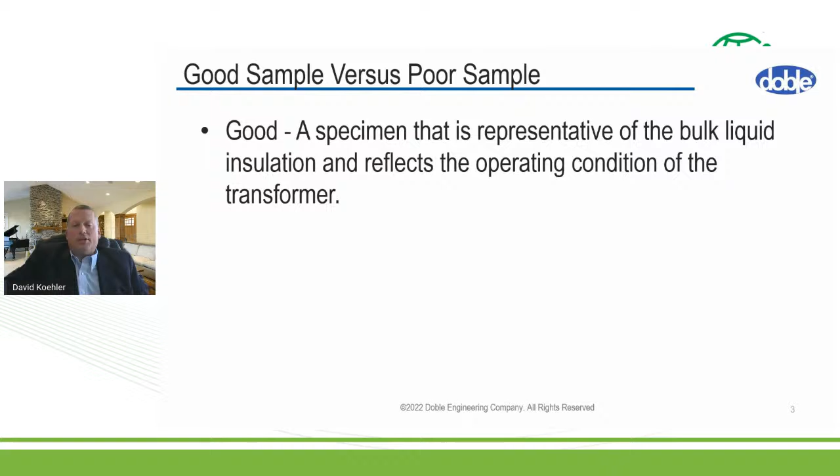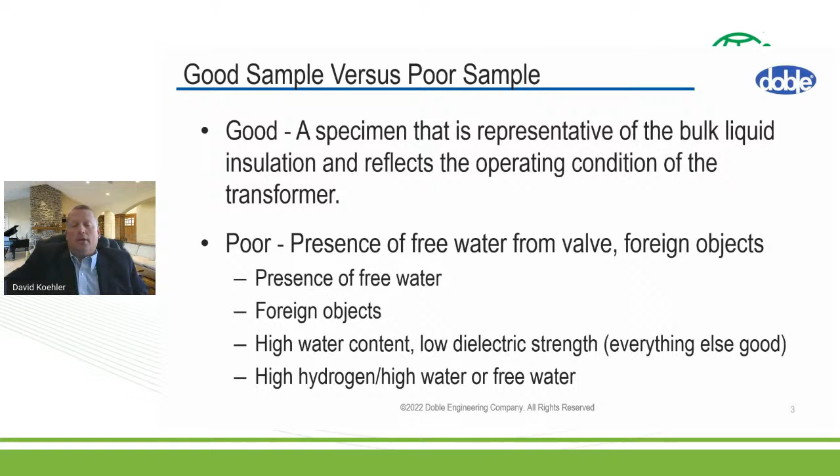What's absolutely important is, no matter what the lab is, whether it's a commercial lab or a utility lab, the sample of oil received for testing must be representative of what we call the bulk liquid insulation within that transformer. Over my years in the industry, I've seen grasshoppers, bugs, etc., all types of things within the sampling containers, but they were not actually in the oil within the transformer, and that can affect the test results we generate.

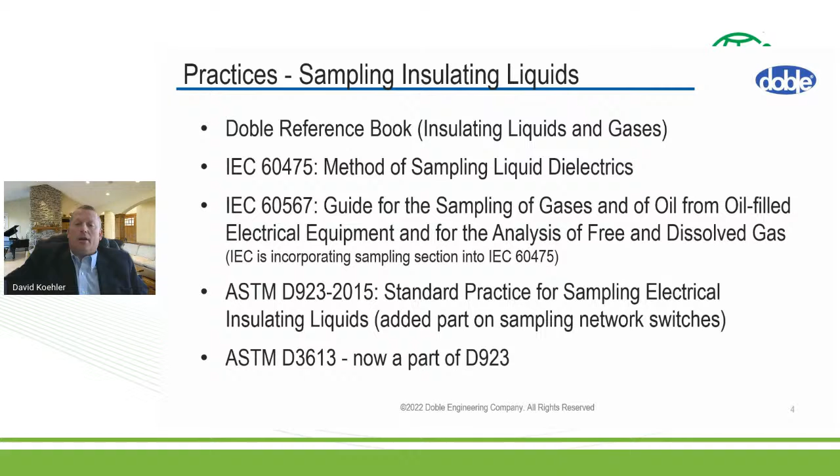There are numerous guides available in our industry on how to obtain a proper oil sample. Doble, the company I work for, has a reference book. IEC has 2 different guides depending on what tests are going to be done. And then ASTM has ASTM D923, which is predominantly what's used here in the United States and Canada.

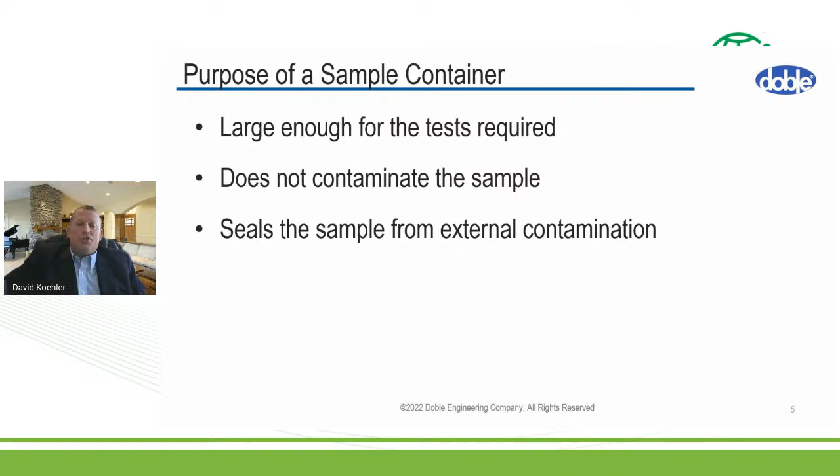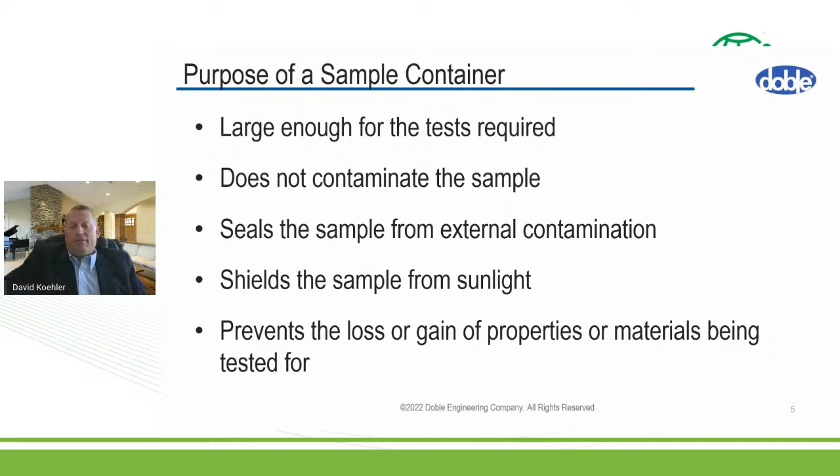Now, why do we use a sampling container? We need to make sure it contains enough oil for the test being requested—usually we ask for twice the amount of oil. We also want to make sure it doesn't contaminate the sample, whether through leaching or water ingress issues. You also want to make sure it shields the sample from external contamination—sunlight has energy, so there are UV rays. You want to make sure that oil is not degrading before it's tested in a lab, and of course it prevents the loss or gain of materials being tested for.

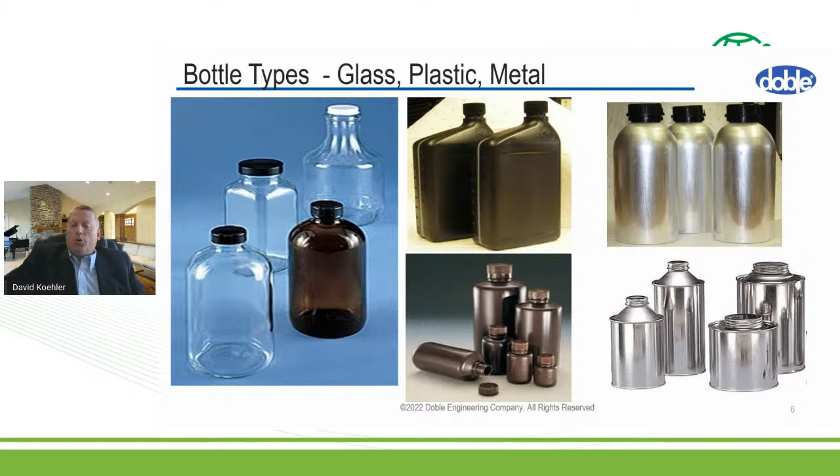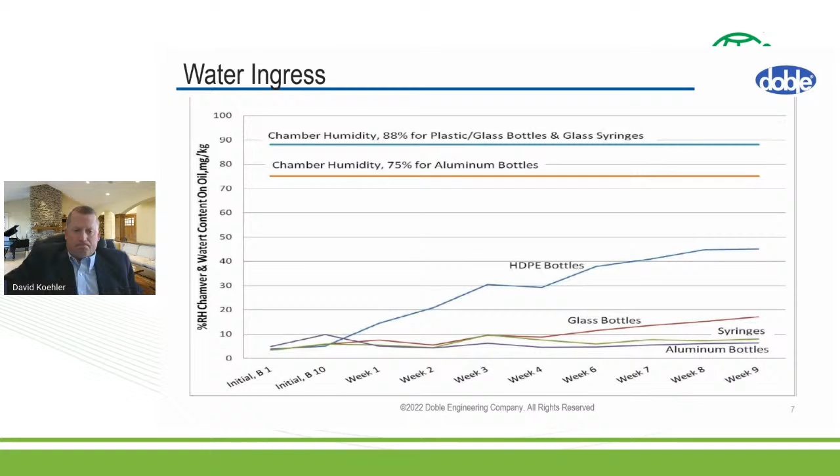Condition-based maintenance is the focus within our industry, within the Power and Energy Society. Through oil tests, we can make condition-based maintenance possible. When I started in this industry in '98, it was time-based, so they would take oil samples every year, every other year, depending on what the utilities' practices were. But now we've moved to a much more effective and cost-effective condition-based monitoring system.

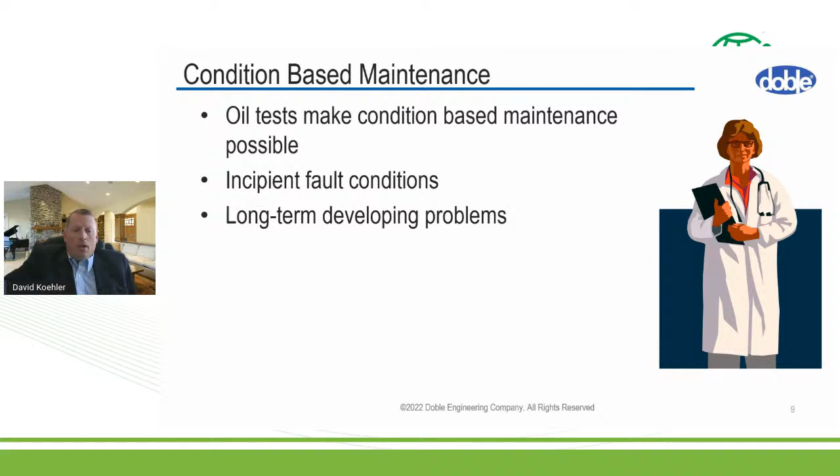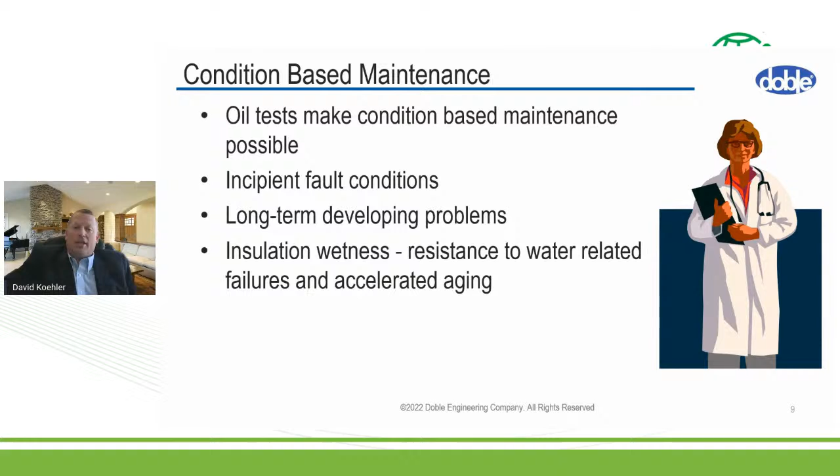It allows us, most importantly, to identify incipient fault conditions. That could be overheating, that could be an electrical issue within a transformer. It allows us to find the issue before the unit fails or any other catastrophic issues occur. We can also identify long-term developing faults. We can tell if the oil or the cellulose insulation, which is in the windings at the center of the transformer, is wet. Water's bad in insulation systems and causes significant issues, and it also affects the aging life of the insulation.

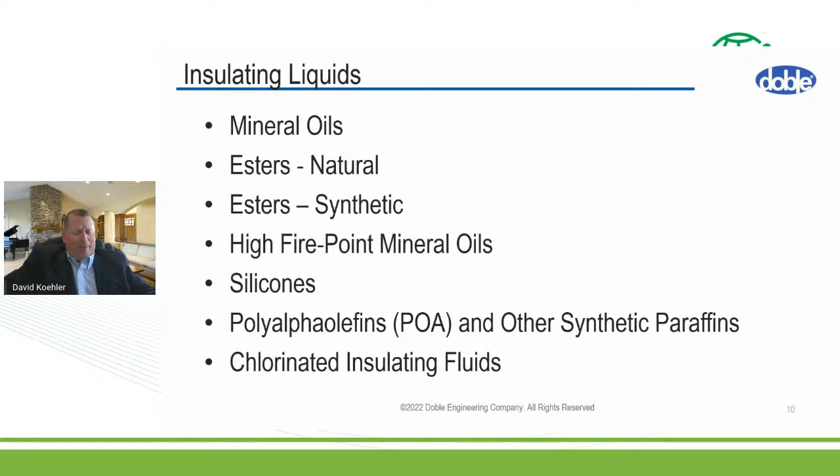So we have various types of insulating liquids currently available globally. The one used most is mineral oil, and that would be the focus of my talk today. But we have natural and synthetic esters, silicone oils, and down below are chlorinated insulating fluids. Those aren't made anymore, but you still have some transformers filled with this liquid.

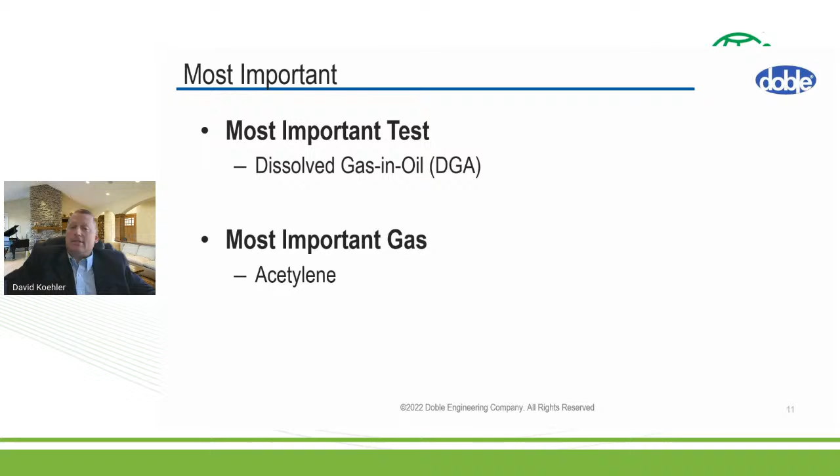So again, the most important test is called dissolved gas in oil. What we do is extract the gases out of the oil, analyze them, quantify them, and see what's present. The most important gas we look at is acetylene. It takes the most energy, the highest temperature to form, and we'll talk about that.

So from DGA, we can tell the following issues just from the test results and looking at trending. We can tell if it's a partial discharge issue, overheating issues, whether it's low temperature or high temperature. Arcing, of course, in a transformer is the worst case scenario—that unit will fail unless it's remedied. We can tell if it's the breakdown of the paper, maybe there's stray gassing, which is a chemistry reaction that takes place with different oils that aren't refined properly, or maybe there's contamination.

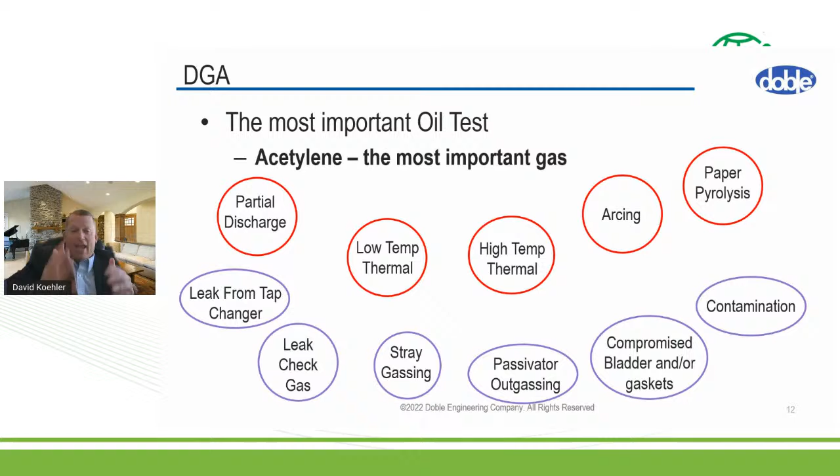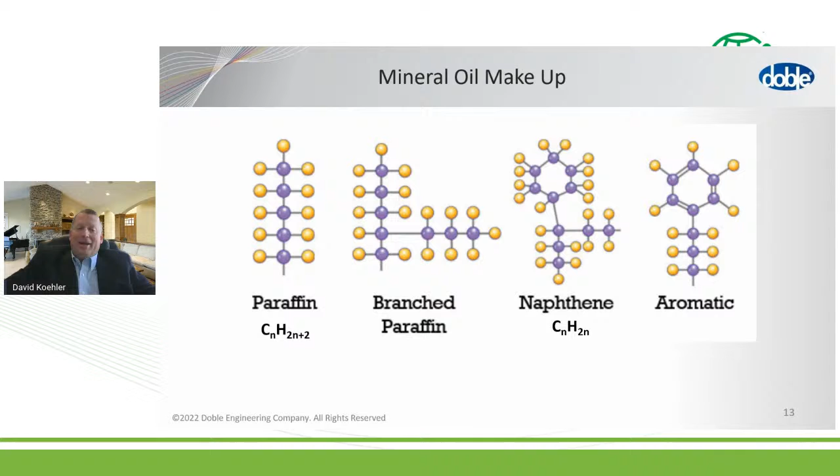Now, when we talk about mineral oil, we call it a hydrocarbon oil, and that just means it contains a bunch of hydrogens and carbons. You can see here the purple would be carbon, and the yellow would be hydrogens. It can be in various different structures, whether paraffinic or aromatic, but at the end of the day it contains hydrogen and carbon molecules.

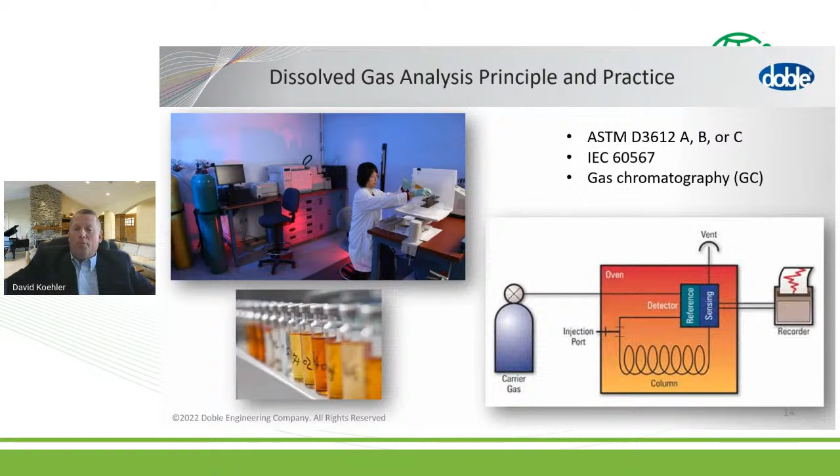Now, how we do this test is we take the oil, put it in the vial shown in the lower left-hand picture, and in the top left picture you can see a gas chromatograph, or GC. That oil is heated up, shaken for a period of time, and the gases that were dissolved in the oil are liberated out and go to what we call a detector, giving us what we call a chromatogram. Based on the retention time, or where the gases elute from the column to the detector, we know what gas is being analyzed.

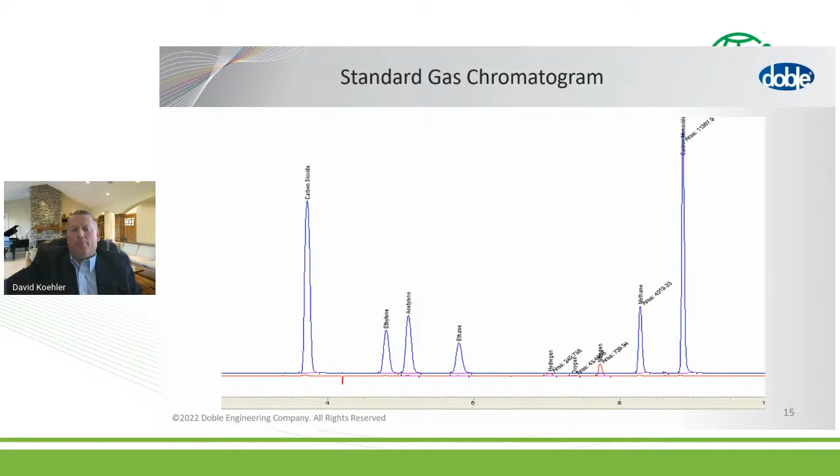And then from proper calibrating procedures, we can tell based on the area under the curve what the equivalent parts per million will be for each of the gases being analyzed.

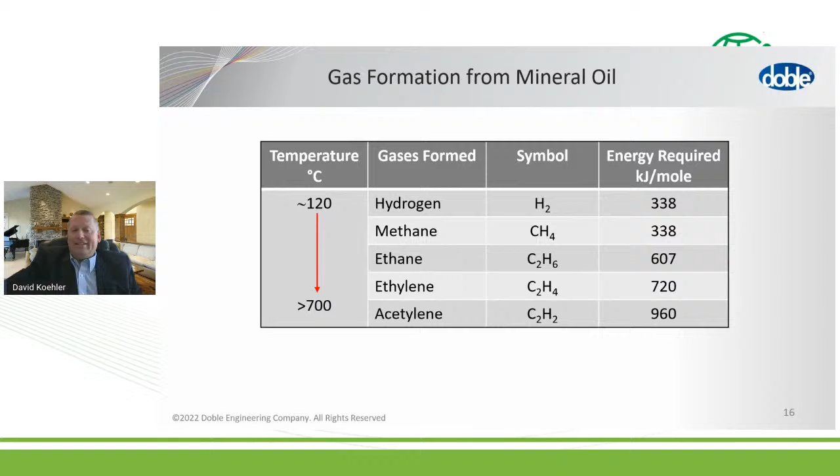So again, when we talk about the breakdown of mineral oil, acetylene starts to be produced at about 700 degrees C. That's a very high temperature hot spot, most likely caused from arcing.

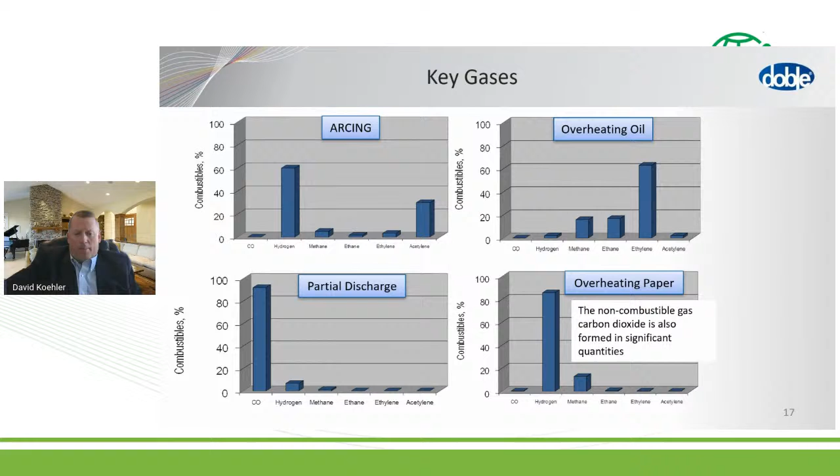Depending on what temperature and duration, you'll have various levels of the other gases. Bottom left would be partial discharge. We have carbon monoxide and hydrogen. And to the right, we have overheating of paper.

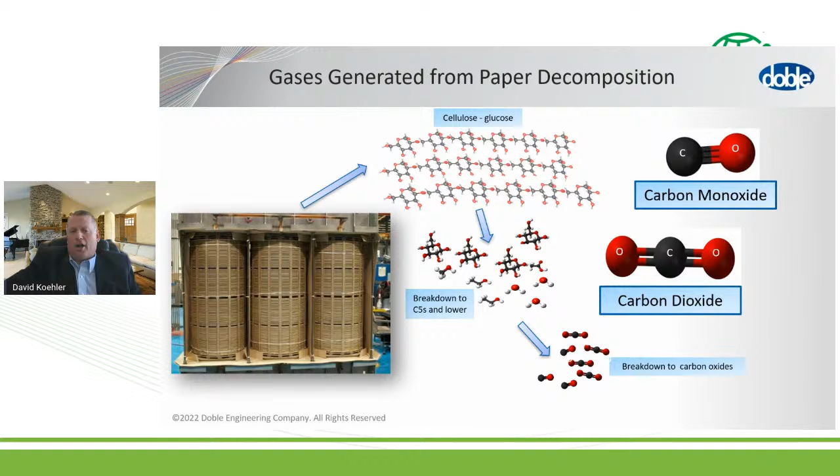This is a picture of the windings of a transformer. When they break down, they degrade from the cellulose structure and produce glucose. Glucose is not readily soluble in oil. However, it will break down and form carbon monoxide, carbon dioxide, and what we call furanic compounds, and we'll talk about that. But once we get the data, we need to know more information.

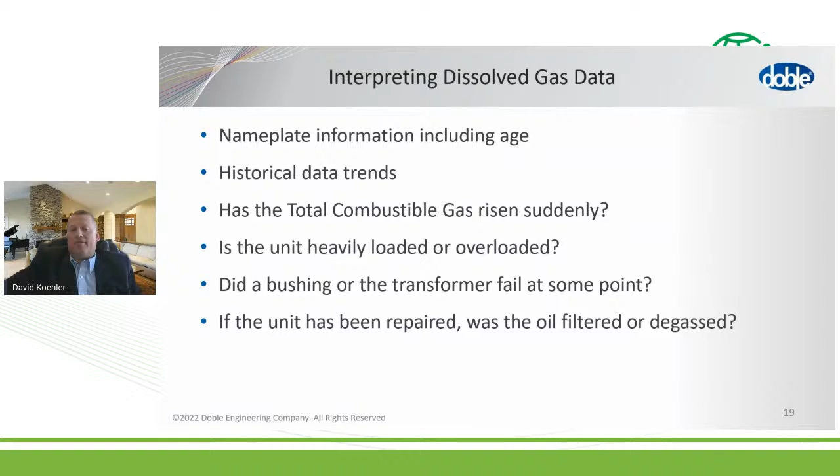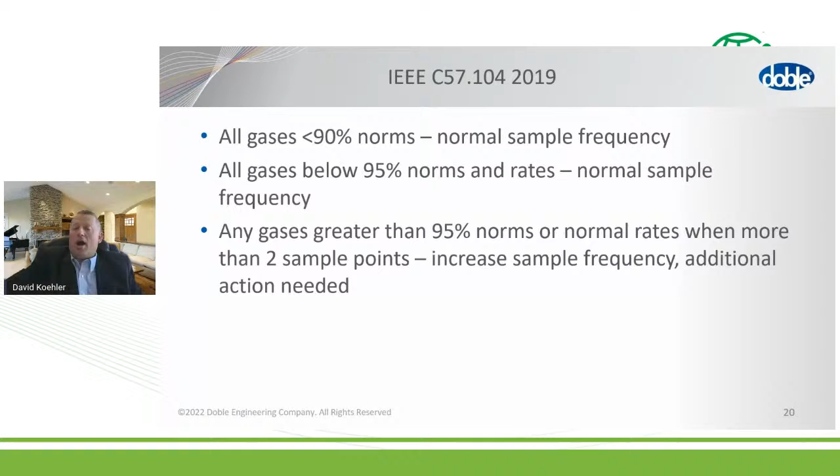Our Standards Association with IEEE came out with, in November 2019, an update to IEEE C57.104. What it did is it broke down the DGA results into 3 different statuses. Status 1 would be all gases below the 90th percentile norms that they published. Status 2 would be all gases below the 95th percentile norms and rates. However, any gases higher than the 95th percentile thresholds or normal gas generation rates required increased sampling frequency and additional actions. So that unit could be in a status 2 or 3.

The tests that we do on the oil are broken down into 3 different categories. On the left, the most common ones, are diagnostic tests. In the middle, tests that allow us to ascertain whether the oil in its current condition can do its job, which is dissipation of heat from the windings where the heat is really generated, and acting as a dielectric liquid. To the right are investigative tests, which would be recommended should any of the other mentioned tests come out abnormal or not make sense.

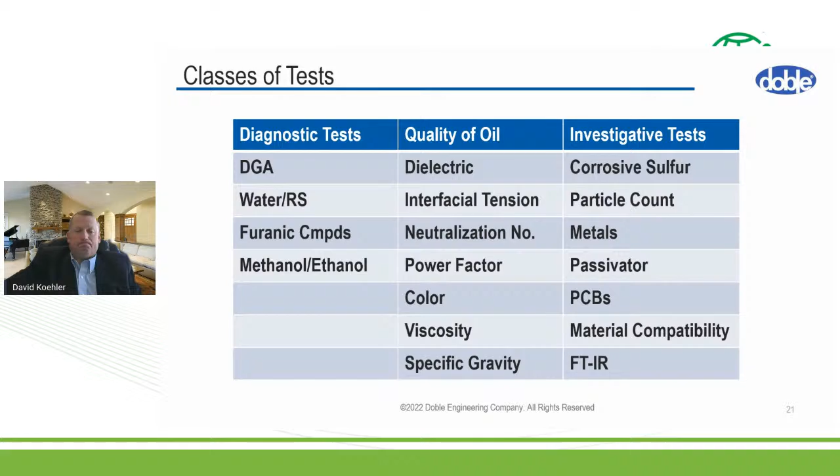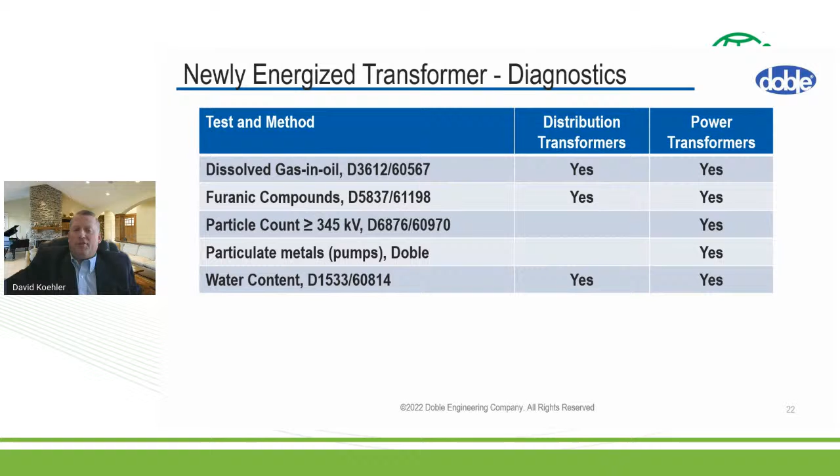So for newly energized transformers, if it's a power transformer, we recommend all these tests be done. If it's just a distribution or smaller voltage class transformer, we recommend a DGA, furan, and water content just to establish a baseline reading for your unit.

So you would want to do DGA again, the most important test, at all these durations: a day after energizing, a week, a month, 6 months, and a year. And why is that important? Because these transformers come with warranties, and you want to identify an issue with the transformer before that warranty ends, to protect your investment.

Oil quality tests on new transformers: the oil doesn't degrade quickly unless there's a leak, or there's high levels of oxygen, or a lot of heat that's available. So we just recommend a common screen package be done there.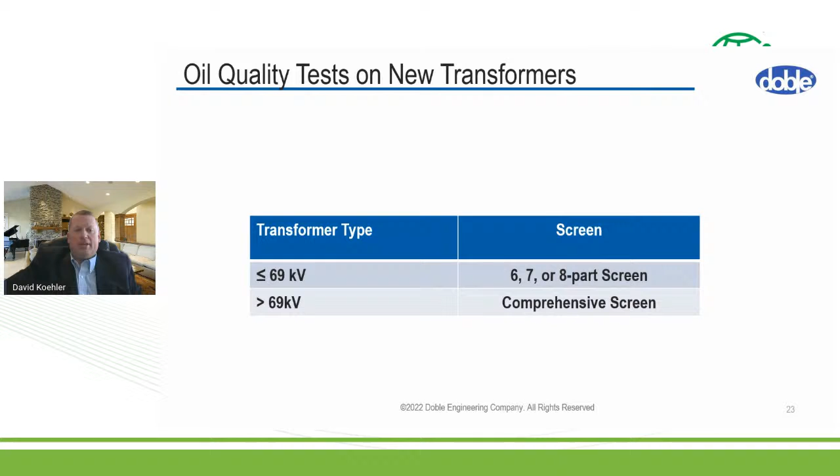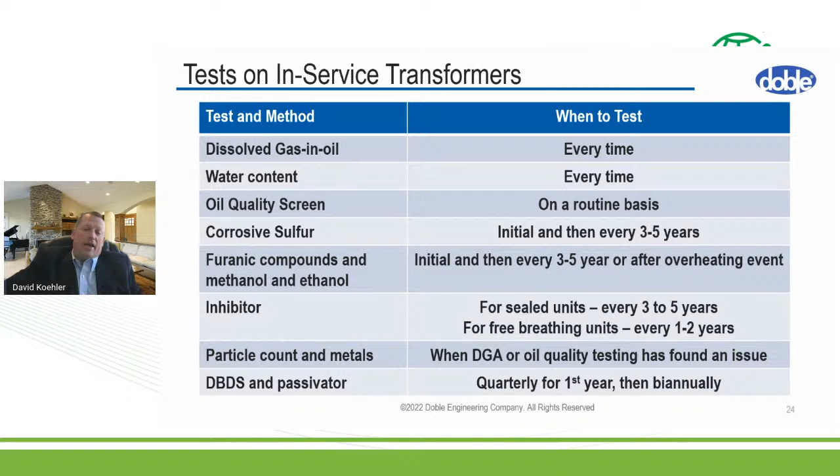Then tests on in-service transformers. Every time you're going to pull a sample, we'd recommend you pull a syringe, which is where you get the oil for the DGA and the water content. Other tests can be done on a routine basis, depending on: is it a sealed unit? Has there been any overheating issues? All those types of things.

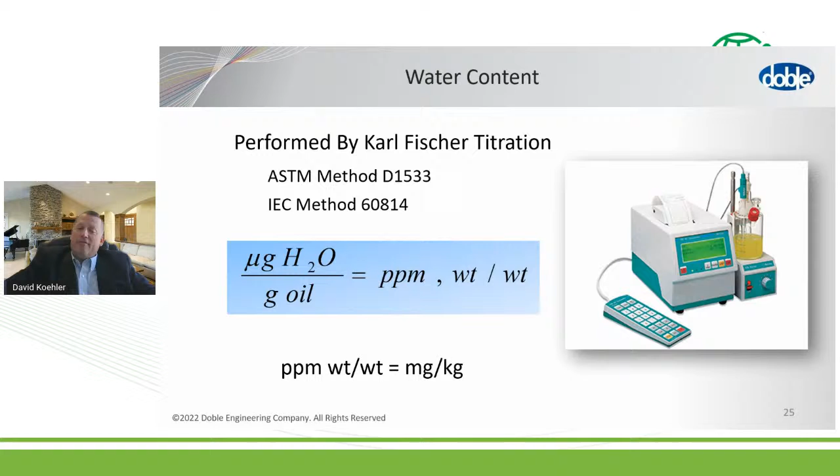Another important test we do in the laboratory is measure the amount of water dissolved in the oil. We do that via ASTM D1533, also called the Karl Fischer titration method, named after the famous German chemist that developed the test method. We literally take the oil and inject it into that red circular area, and it goes right into what we call the vessel solution. The test equipment measures the micrograms of water, and from that we can calculate the parts per million of water dissolved in the oil.

Why is water important? We interpret water results similar to how we do with the weather and percent humidity. We need to look at the percent of water present relative to how much water that oil can hold at a given temperature. For example, mineral oil at 90 degrees C can hold up to 592 parts per million. However, at 10 degrees C, it can only hold 36 parts per million.

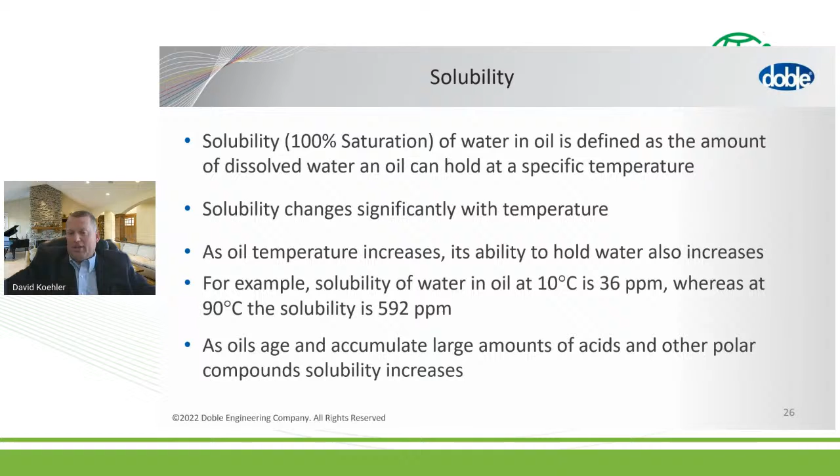So once you get, for example, at 10 degrees C, once that water content of the oil approaches about 35, you're really saturated. You can get free water formation occur, which has incredibly low dielectric strength. This is the expression of the relative saturation in percentage.

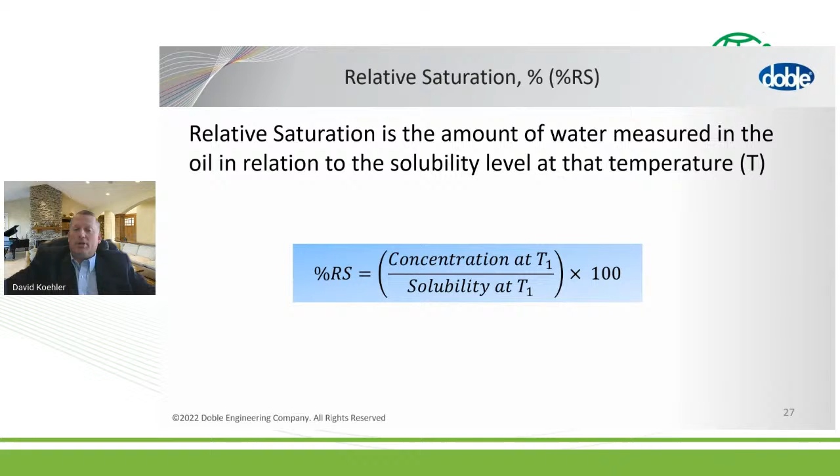Again, we look at the concentration that we measure in the laboratory versus at the temperature at the time the oil sample is taken, how much water can that oil hold, times 100.

Here are two vials. They each contain 30 parts per million of water in the oil. However, the vial to the left is at 50 degrees C. That oil can hold significantly more water, so it has a clear visual appearance and a low relative saturation of water in oil. The one on the right is still 30 parts per million, but the temperature is only 0 degrees C. You can see it has a cloudy appearance. It's got emulsified water, and down below at the bottom, if you could see it, you'd have free water formation.

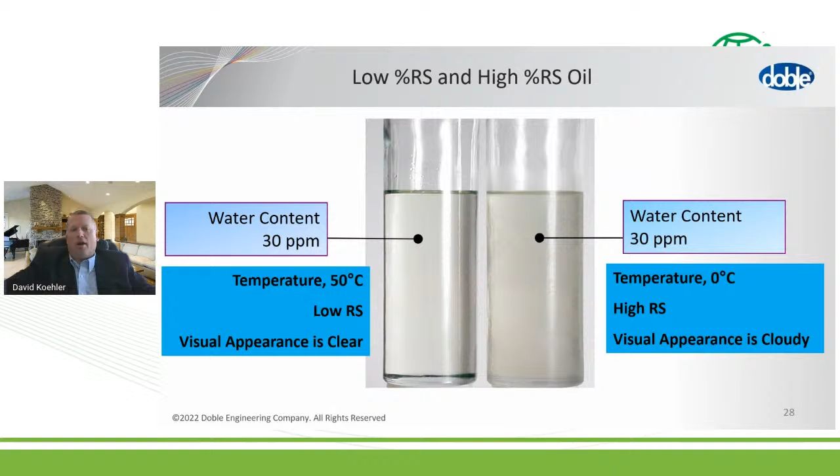So when we continuously measure the amount of water in a transformer with an online monitor, you can see it changes over time. That's because in a transformer, 99% of the water is typically in the paper, not in the oil. But over time, through heating and cooling, through changes in the loading of the transformer, you're going to see changes in the amount of water that's in the oil over time.

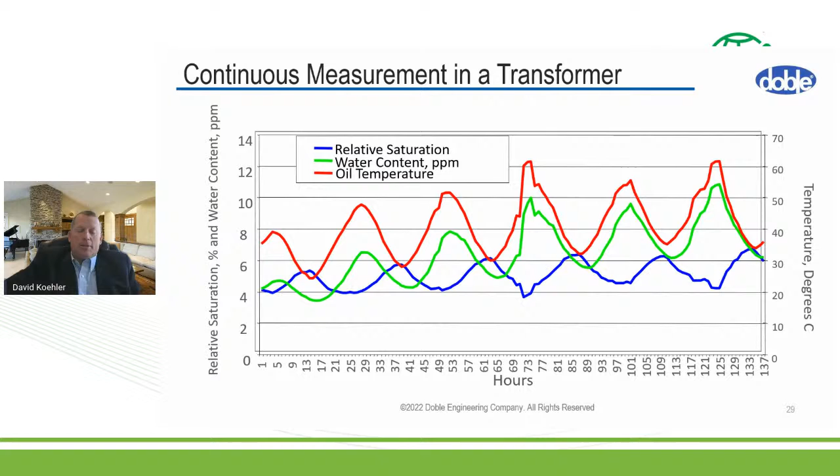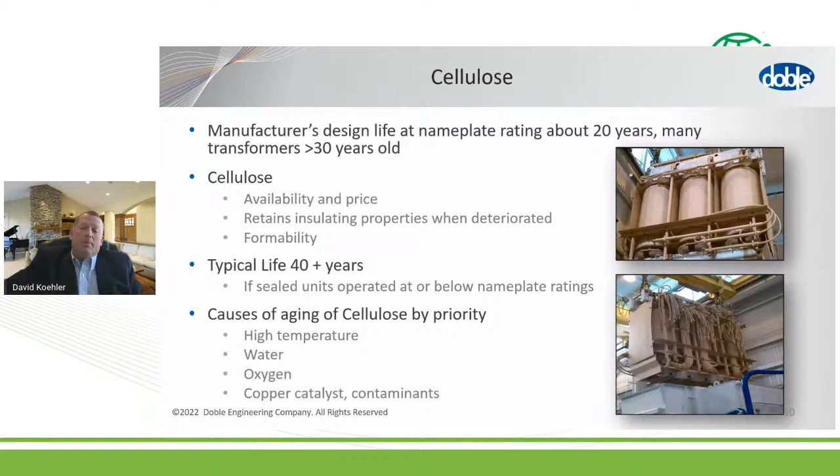The key is keeping temperature down, keeping the water content down, and oxygen. All of those add to the aging factors. You can see here from this slide, the number one aging factor is heat, then in order is water and oxygen. Here's a zoomed in magnification of cellulose.

It's a polysaccharide molecule, and you can see here it goes on for many chains. So when paper is brand new and put in a new transformer in a factory, it has about 1,000 to 1,300 of these chains.

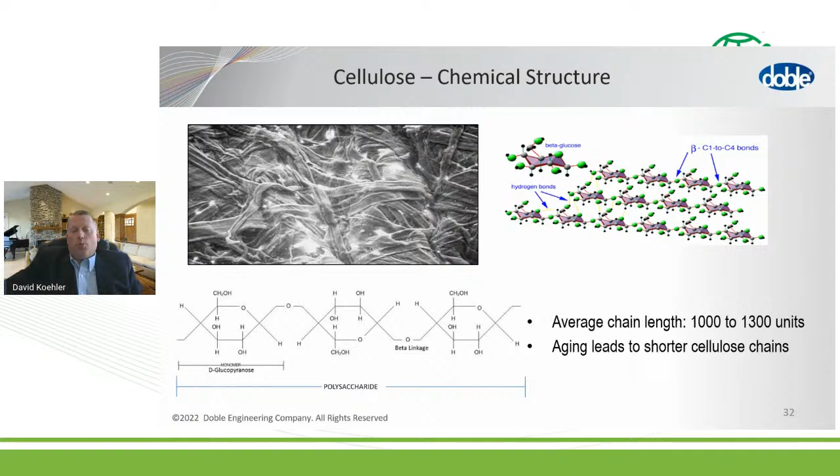However, over time, these bonds become broken and the paper becomes weak and brittle. That, at the end of the day, is what causes the end of life for a transformer.

So again, when that paper breaks down, it produces glucose. That's broken down, and that'll produce carbon monoxide, carbon dioxide. It'll produce acids, furanic compounds, which we can relatively test the oil for, and then alcohols, methanol and ethanol, which we test for very closely, and water.

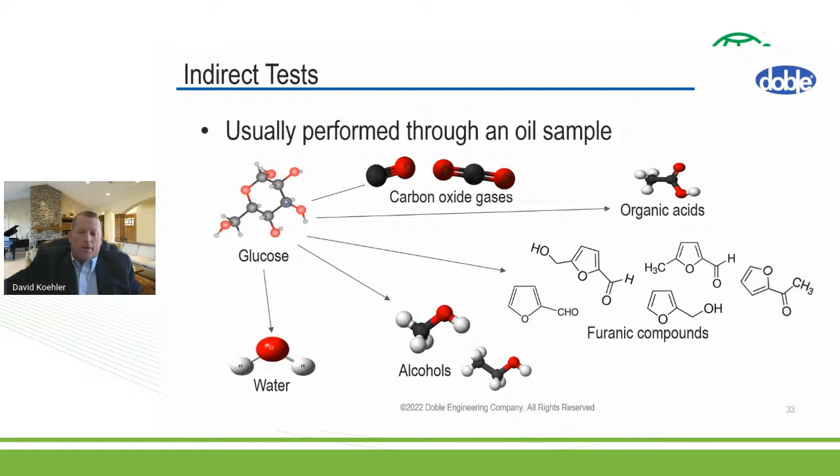So based on these oil test results, what we want to do is come up with a transformer health review or condition assessment. A lot of companies will take the oil test results coupled with the offline electrical test results, testing done when the unit's taken offline, and give an overall transformer condition code.

What they try to do is make sure it's very clean and easy to understand. Red typically means warning or there's an issue, where green is typically acceptable, and they'll give a summary sheet so they don't have to look through hundreds of pages of data. They can quickly see which units require additional overseeing.

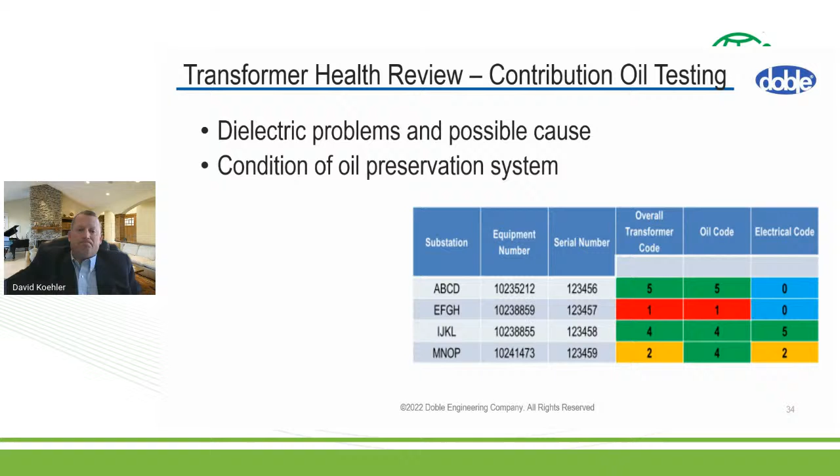They also recommend that you use a software system that allows you to easily access and review your oil test results. That allows you a way to see the condition of your fleet in real time, and allows you to really do a deeper dive and look at those units that are causing more of an issue. This is just an example, and then looking at the trending of your test results. There's a graphical representation of DGA and water content results.

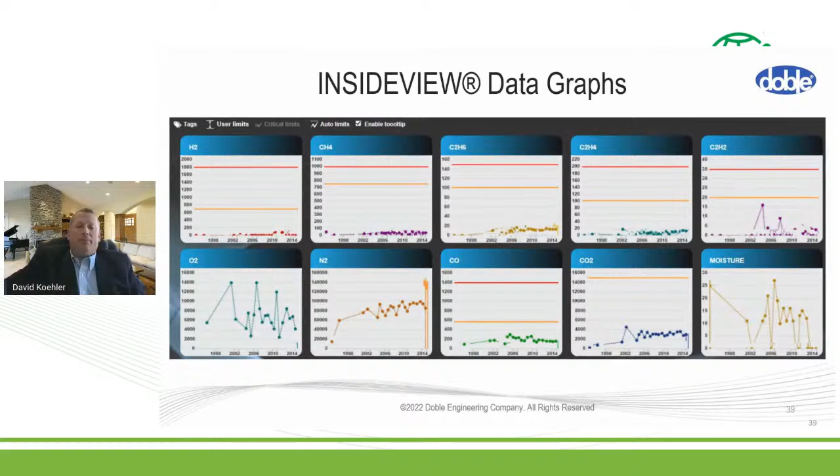Now, in the last few minutes that I have before we open it up to Q&A, let's go ahead and go over, I believe, 3 case studies here. So here's a transformer. It's 24 years old, 115 kV, 40 MVA rated.

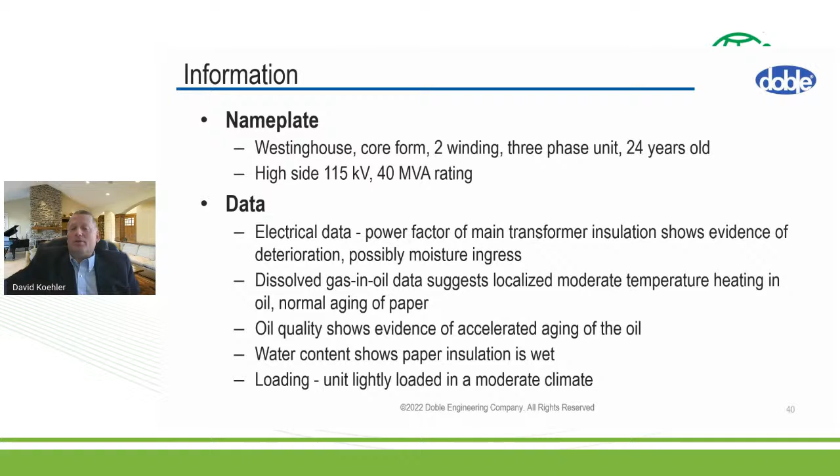The electrical test results showed that the Doble or power factor result was high, which could indicate water issues. The DGA results showed moderate high temperature or overheating of the oil, and it shows the condition of the oil degraded over time. The water content showed that the insulation is wet. However, the unit was lightly loaded, so it shouldn't be having overheating issues.

But let's look at the data. Here's the DGA results. You can see that the gases are going up over time, but with that June 24, 1994 sample, the gases dropped immediately. That's because the utility degassed the oil.

Once you get a significant amount of combustible gases present within a transformer, it can become a safety issue. The oil could catch on fire or the transformer could explode. So what they were doing here was monitoring it over time, waiting for a new transformer to arrive, just trying to make it last.

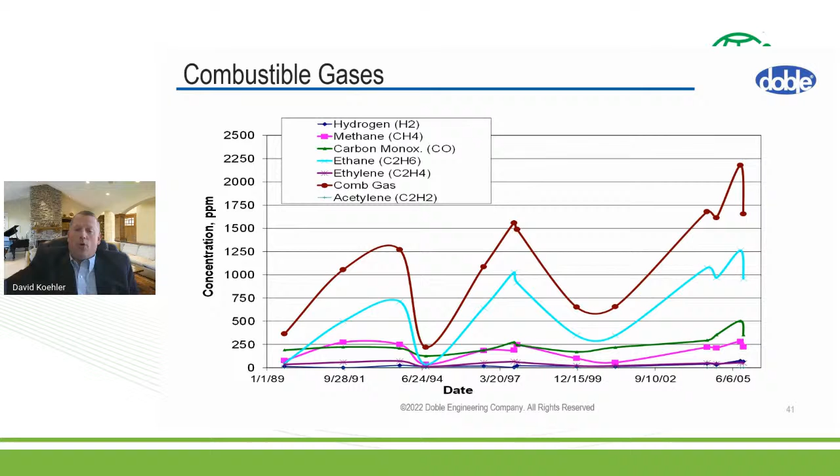But you can see after each degassing, another one occurred in December of 1999, and then of course another one in June of 2005. These gases just continue to rise, showing a clear indication with ethane going up of an overheating issue.

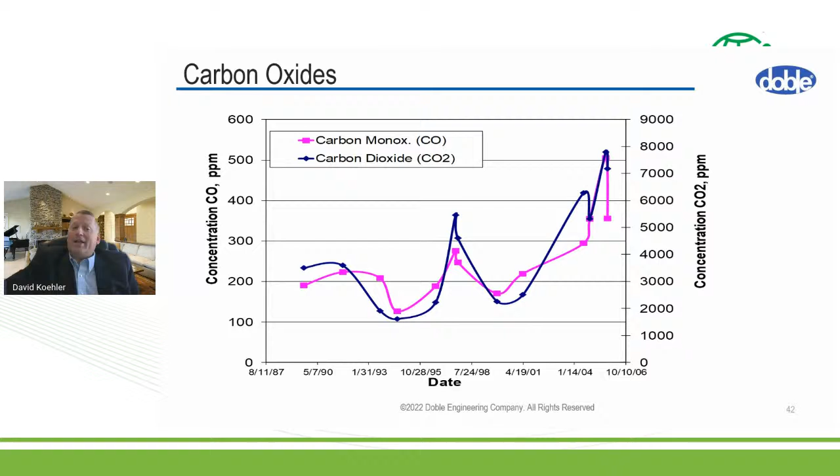As we look at the carbon oxide gases, carbon monoxide and carbon dioxide, again they're affected by the degassing, but over time they're still going up. That's an indication that the paper or the cellulose is breaking down.

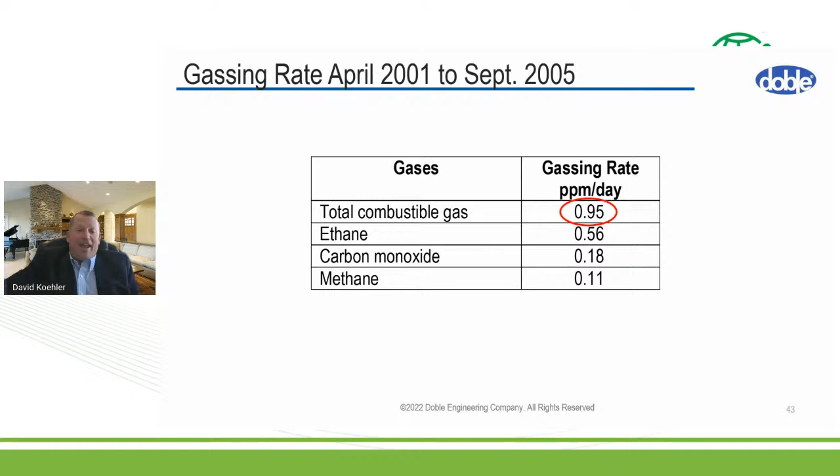As we look at the gas generation rate from April 2001 to September 2005, you can see the total combustible generation rate approached about 1 part per million per day. That doesn't mean the transformer is going to fail tomorrow by any means, but this is a gas generation rate that you need to pay attention to.

As we looked at the water content, the oil only had about 29 parts per million of water in it. The top oil temperature at the time of sampling was relatively low, at 30 degrees C. However, at 30 degrees C, the relative saturation of water in oil is 35%, and that's high. We recommend anything below 15% would be acceptable.

The amount of acid present in the oil was high. Another value, interfacial tension, was low, and the color was dark. So again, indications that the oil had aged from overheating, high oxygen present, and the water.

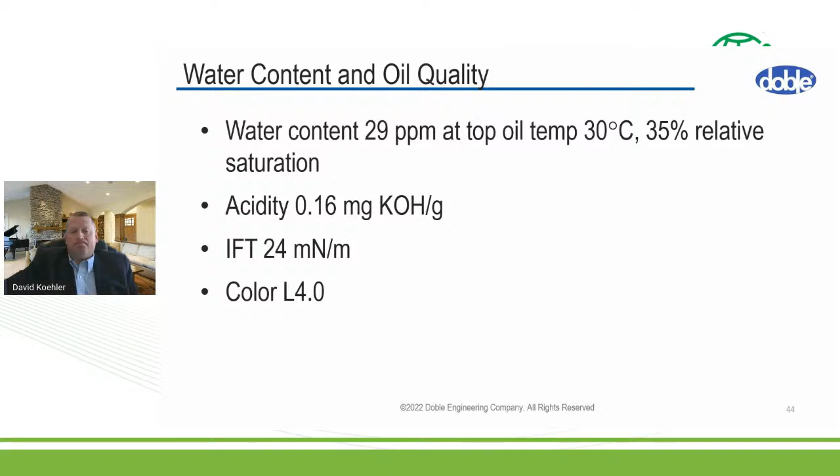Because of that heat, what the utility did is they sealed up the unit after the inspections. They dried out the oil as best they can, doing a field dry out procedure. They reclaimed the oil to remove some of the acid and polar or ionic contaminants that got dissolved in the oil. And then they put the unit right back in service because it was needed for critical demand.

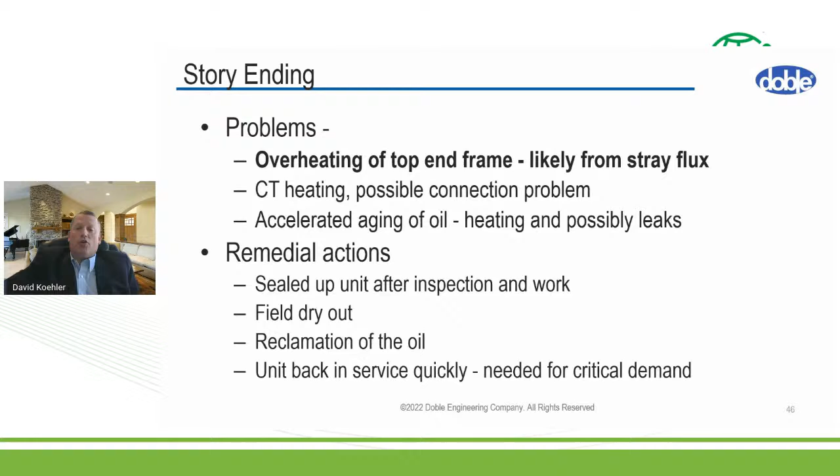This next data is from a utility here in the Midwest where I'm located. You can see everything was fine relative to the DGA results. However, in 2007, there was a tornado that came through and caused an event on the system.

And now all of a sudden, we're generating elevated levels of hydrogen and methane, which are indicative of a partial discharge issue and/or overheating of the oil. And you can see in 2008, they again degassed the oil.

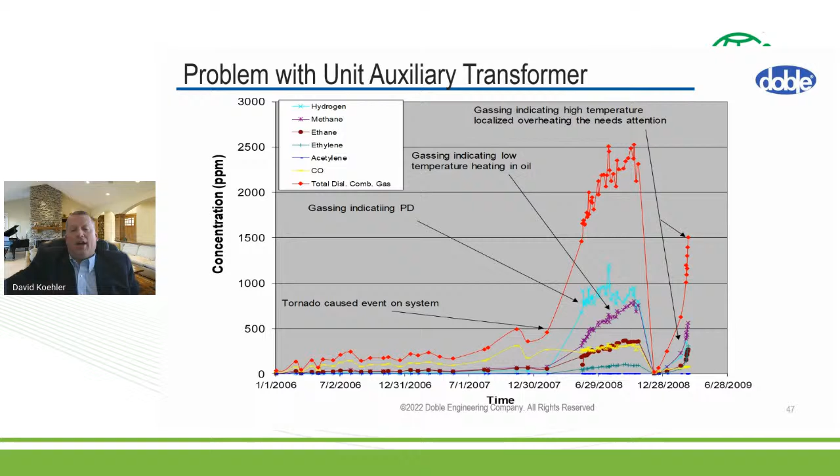However, once they put that unit right back into service, you can see those gases with the red line, the total dissolved combustible gas, just shot up. It was generating about 45 parts per million per day, which is incredibly high. And that unit would fail if not taken out of service by the utility.

This last one is an instrument transformer. The utility called us and said, this unit's been in storage for 12 years. We're not really sure what's going on with it or why it was put in storage, but we'd like to put it in service. What are your thoughts?

And of course, we responded with, let's do some testing. Let's see the condition of the oil and see if you can find any additional records. So after 12 years of storage, this is the DGA results.

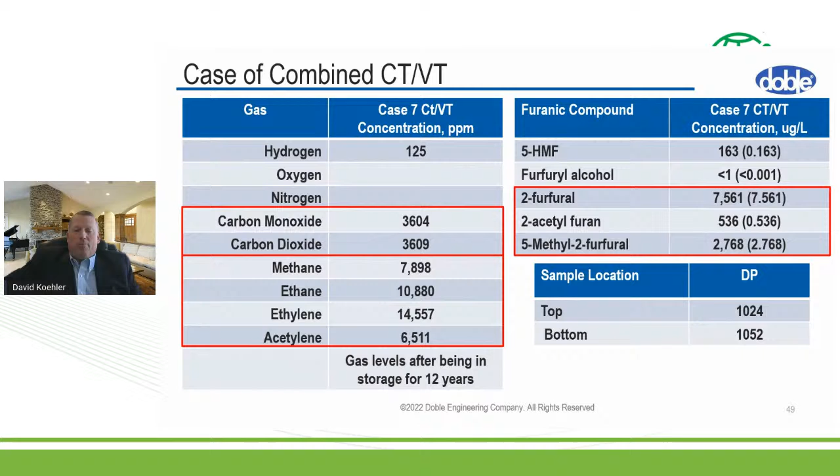These are incredibly high values, so obviously we did not recommend that this unit be put back into service. Also, from the furanic compound chart in the upper right-hand corner, we had incredibly high values in some of the key ones, especially 2-furfural. That's an indication that the cellulose insulation in the paper and the windings were severely degraded within this transformer. With that, I'd like to stop my presentation and open it up for any Q&A that we may have.